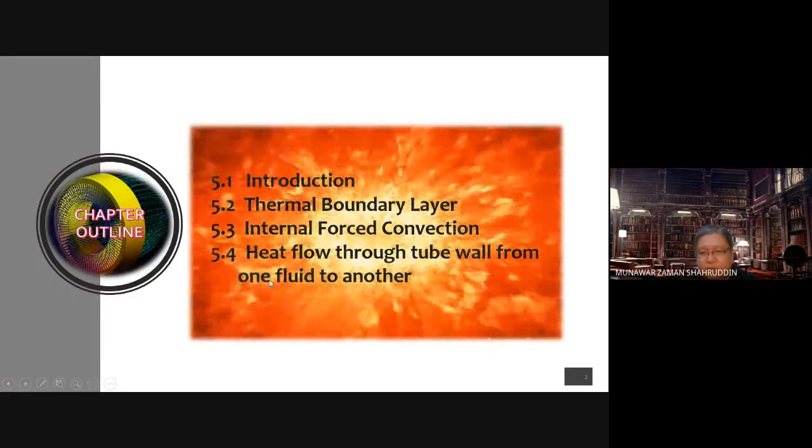So this one is basically convection, heat transfer, convection mode, or convective heat transfer. So you have introduction, the thermal boundary layer, the internal and external forced convection, and you have heat flow through tube wall from one fluid to another.

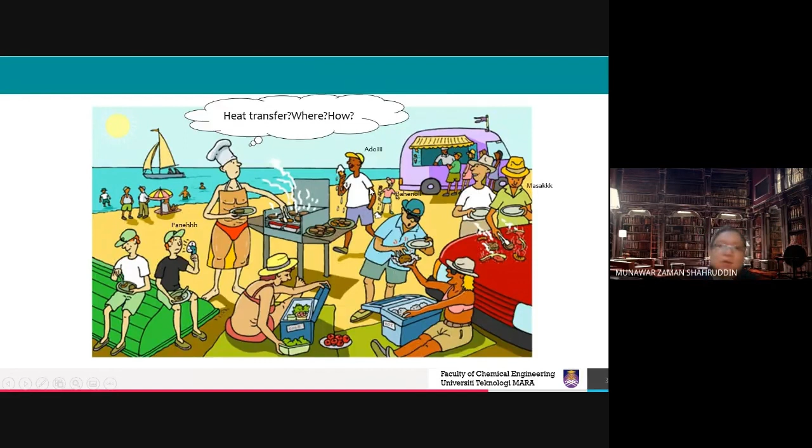So now we are talking specifically on convection. Convection is a mechanism of heat transfer through a fluid in the presence of bulk fluid motion. The keyword for convection is fluid motion. So for this kind of heat transfer mechanism, it is rather different compared to conduction, because it involves bulk fluid motion.

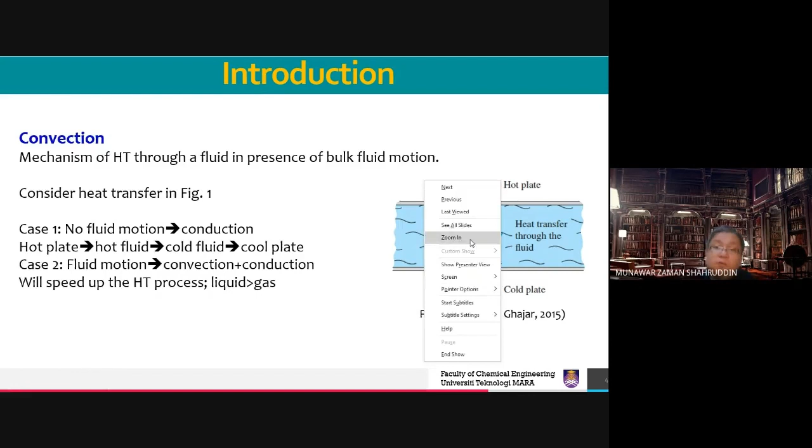So when it involves bulk fluid motion, you have to know two things. Number one, fluid properties. Number two, fluid flow, which involves region.

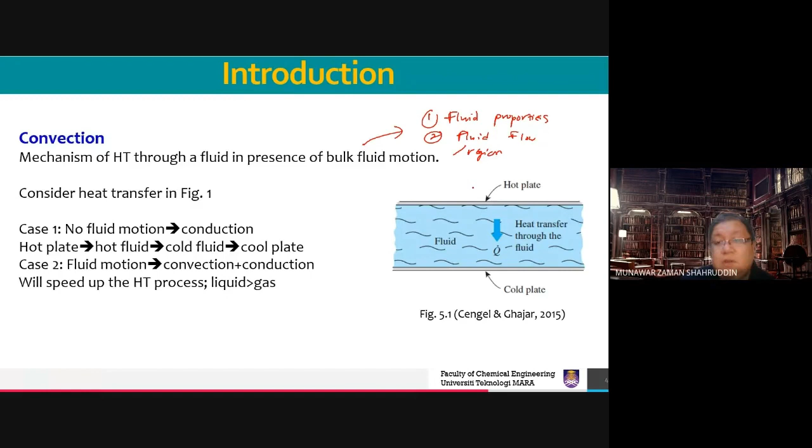Region or regime. So region will refer to whether it is developing or fully developed. Developing means it is still not stable yet. Fully developed means the process is already complete, or at steady state.

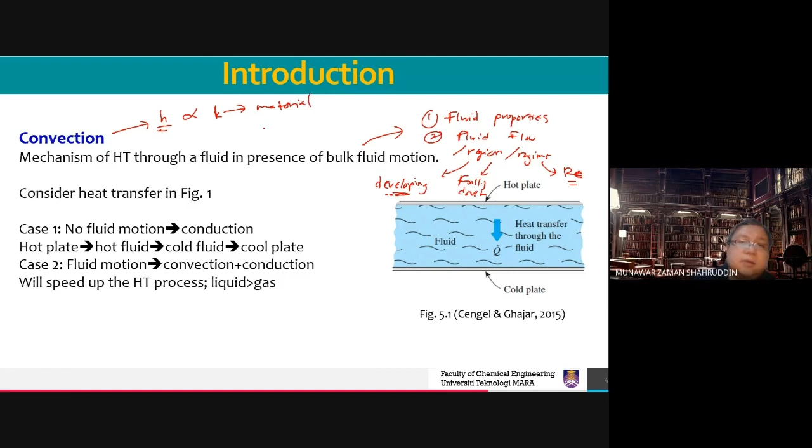Flow regime is basically determined based on Reynolds number, which I think you're familiar with. So basically convection is about determining the value of H, and what might be the relationship of H and K. K reflects the material, H reflects the geometry, the geometry and the fluid flow.

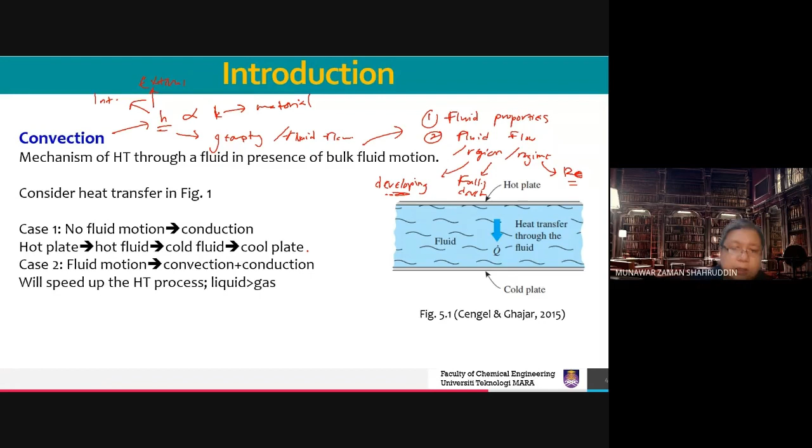So, liquid motion - if the fluid is liquid, it will be much easier to be heated, or to transfer the heat, compared to gas, because gas has a larger distance between molecules. So basically, in terms of heat transfer, liquid is much better for the heat transfer process.

If you reflect back to the previous topic, which is conduction, it only involves several factors that influence the rate of heat conduction - only 4. So for heat convection, this can be regarded as the most complex heat transfer mechanism, because of the H value.

This is actually the issue - H. Because H is determined by fluid flow, determined by the roughness of the surface, and also determined by the geometry of the surface, whether it is internal or external, or whether it is in the cylinder, or in the sphere, or in an annulus, and so on and so forth.

And you also have fluid velocity V, and specific heat Cp. Then you also have density rho, and thermal conductivity K, and dynamic viscosity, which is this one.

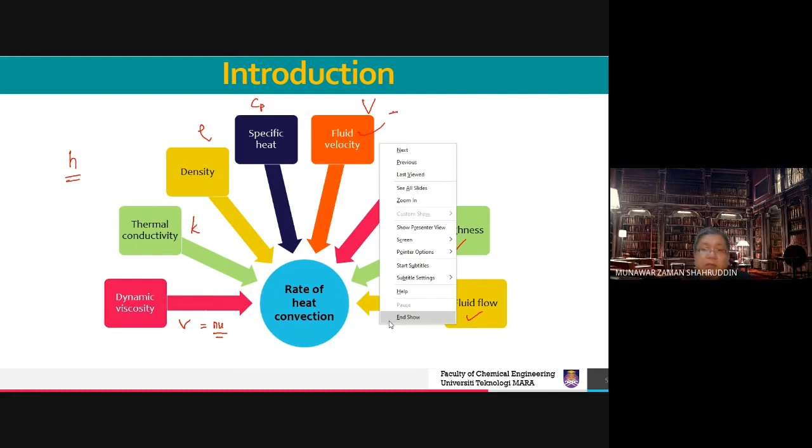Kalau NU, macam mana U ni? Yang ni huruf Greek letter - this would be the dynamic viscosity. So kinematic viscosity is basically mu over rho. That is dynamic viscosity, so that is the factor that will affect the rate of heat convection.

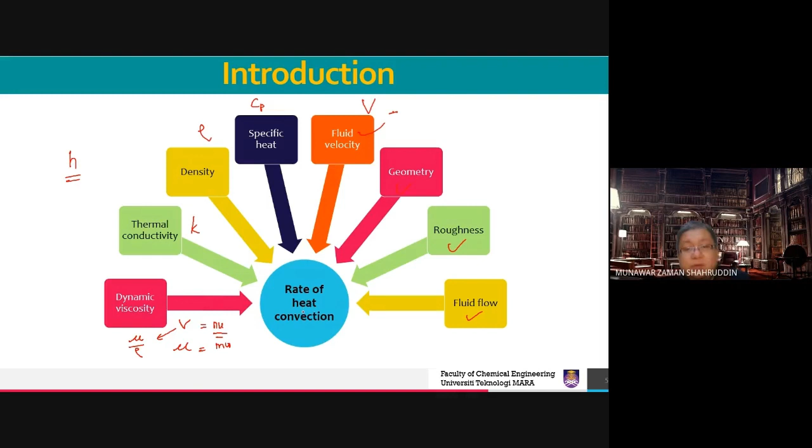All right, we go to the specific theory on convection. Ada dalam 10 minit lagi ni. We call it Newton's law of cooling. Dekat dalam conduction, we have Fourier's law of heat conduction, and then for convection we have Newton's law of cooling.

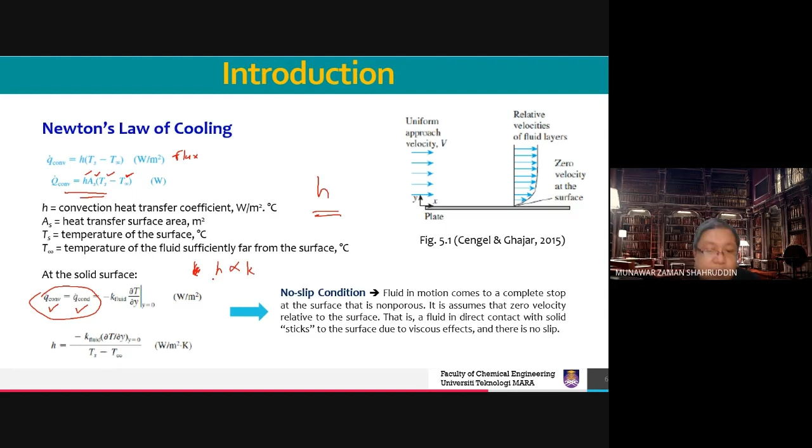Akhirnya berlakulah this introduction of the theory, which is being called Nusselt number, by this pakcik - Wilhelm Nusselt nama dia. He introduced the Nusselt number, which relates in between H and K with the characteristic length. This characteristic length ni is basically mewakili panjang surface tersebut, and then the thermal conductivity and the heat convection.

Maksudnya kat sini, if Nu is larger value, more effective convection. Maksudnya sekarang kalau Nu is very high, let's say Nu is 100, so bermaksud nu ni ataupun HL ni, yang K ni is conduction, so ni motion atau convection lah. Conduction akan 100 kali lebih kecil daripada convection bila larger value of nu ni. Nu ni, Nusselt number ni nu lah kita sebut.

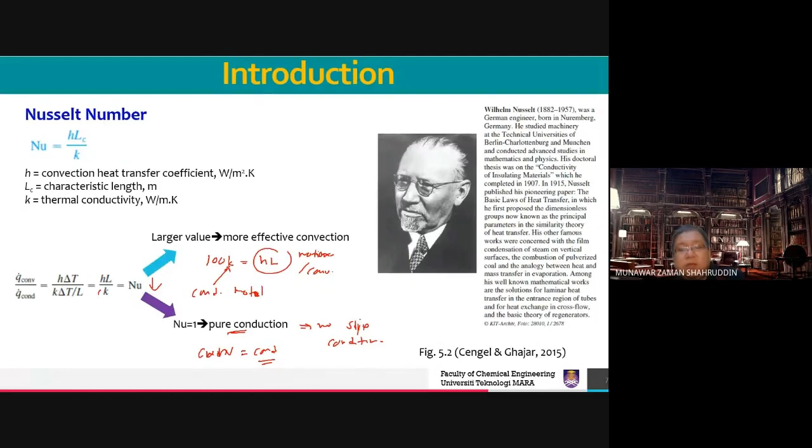So in this chapter, you will have to learn several terms lah: viscous versus inviscid regions, internal versus external flow, compressible versus incompressible flow, laminar versus turbulent flow, natural versus forced convection or flow, steady versus unsteady flow. So normally we will only consider on this steady flow, ni tak ada lah, and 1, 2, 3 dimension ni tak ada. Ni tak ada, ni tak ada, yang ini je ada.

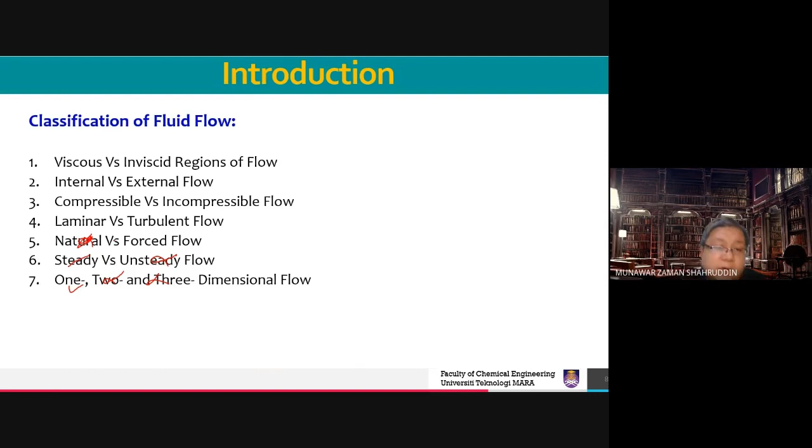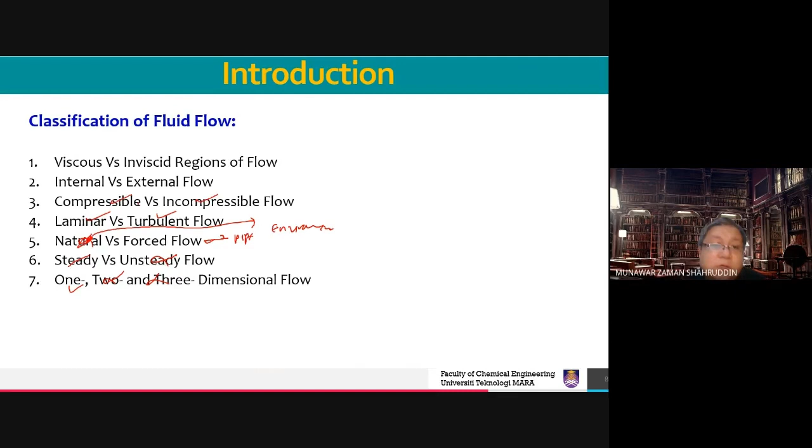One dimension. Natural we will not ni - boleh lah, ada jugalah natural, sikit. Force convection pun ada, normally dekat dalam yang ini dekat dalam pipe. Yang ini environment. So laminar and turbulent memang ada lah dua-dua. Compressible, incompressible ni pun ada juga dua-dua. Internal and external, yes. Viscous and inviscid ni pun ada. So this is the classification lah yang you perlu tahu.